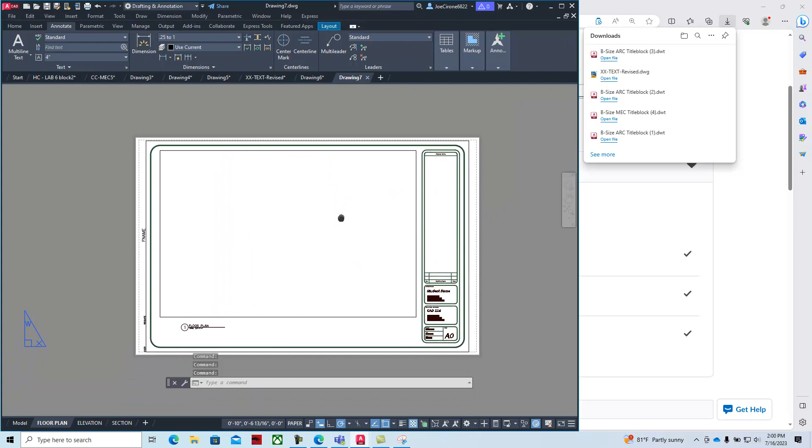So for example, if we download the architectural template and we open that, here's our paper space, and you can see this little right triangle. This is called layout mode. And then here's our model space, and in our model space is where we would do all of our drawing. And so if we were looking at something like our floor plan drawing, in our model space we have this at full size, 17 feet by 19 feet.

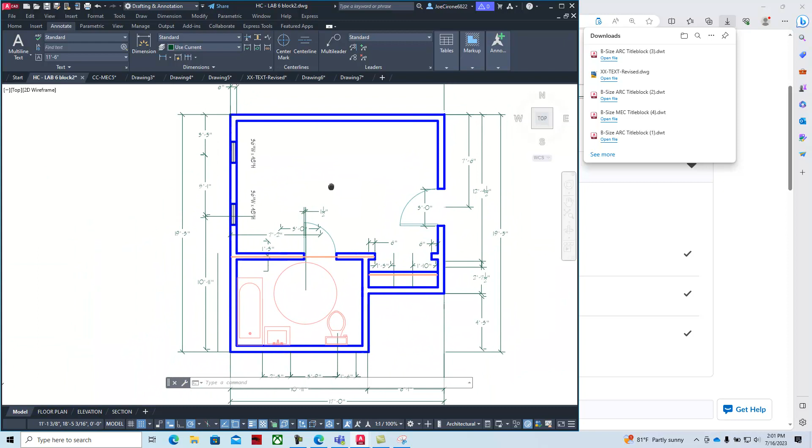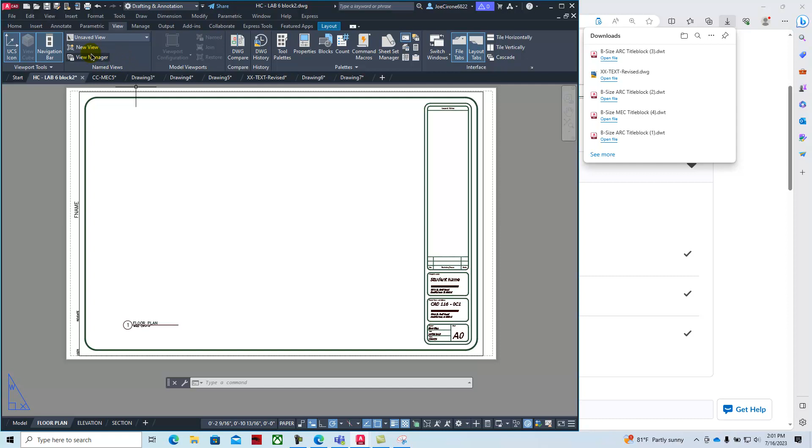And then when we place it on the title block, we go to layout mode, and then we create what's called a viewport. And so if I delete this viewport, and then if I were to recreate the process, the way that we standardize in this CAD course is that we use the viewport layer, and then we go to the view tab, and on the view tab we can create new viewports, and for some reason they get kind of blocked out. Let's see if this is the one. New view. No, that's the view command.

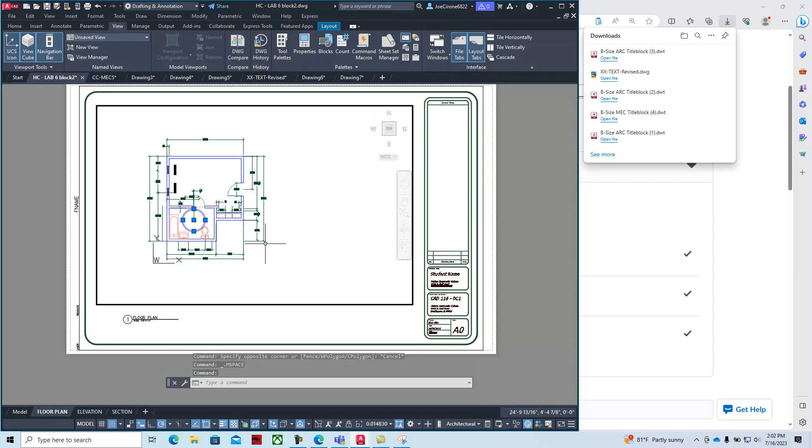So we'll use the menu bar and we'll go to viewport, and we'll create a viewport. And so we can say one viewport, and we create a rectangular viewport, and then if you double click in that viewport, that's where you see what you drew in model space. And so you can edit it right there in the viewport. Some people in interior design will do that. We can talk a little bit about that, where we have special settings within the viewport tabs. But you'll also notice that when I deleted that circular shape in model space, it's also been removed. And then if I were to undo that till it comes back, you'll see it in model space as well.

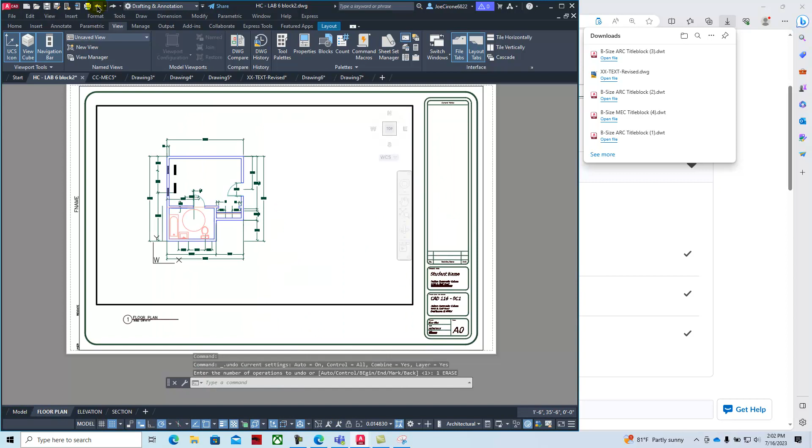And so we use these viewports to set the scale within the viewport. And so here we can go through and set up a scale factor for that. And so by setting a scale factor, when we bring this drawing to the facilities department, we can then use a scale to measure it. And so we could go and get an architectural scale from Amazon, and then we would be able to go through and measure that precisely.

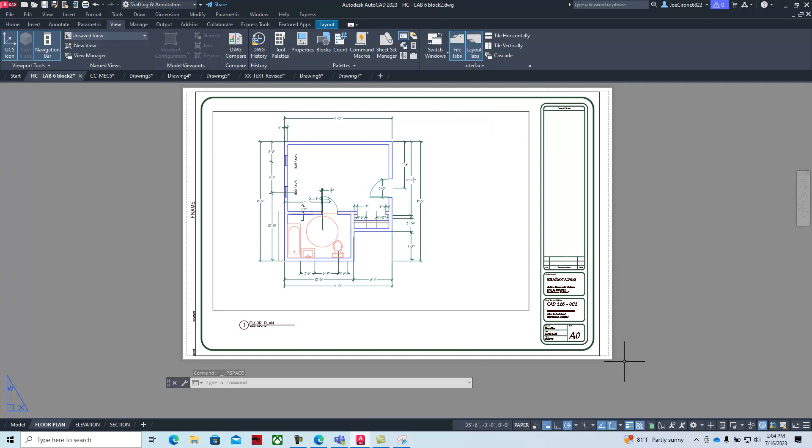So for example, if you were going to measure this drawing, you could buy an architectural scale, and then the units of measurement for 1/4 of an inch equals a foot can be measured using an architectural scale. It's a little tricky, but it's not that difficult when you get down to it, since everything isn't digital these days. That's why we create these drawings in these different viewports with these different scales. So when we print this out on an 11 by 17 sheet of paper, we can then scale the drawing, and the measurements then will translate to the measurements that we have dimensioned there. All right, continuing.

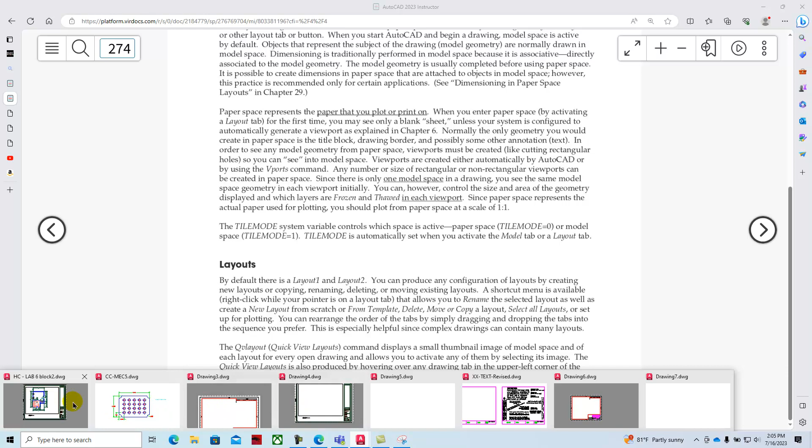So paper space and model space. We draw things in model space, and then we can flip over to paper space. You can type the word TILEMODE, and that would be the command that is used to flip the screen. So if we're in a drawing here and I type in TILEMODE and I change it to 1, TILEMODE 0. Remember, AutoCAD's binary. It's made by computer programmers, and so 1 and 0, on and off, you find a lot of the settings, instead of saying on or off, it's either 1 or 0.

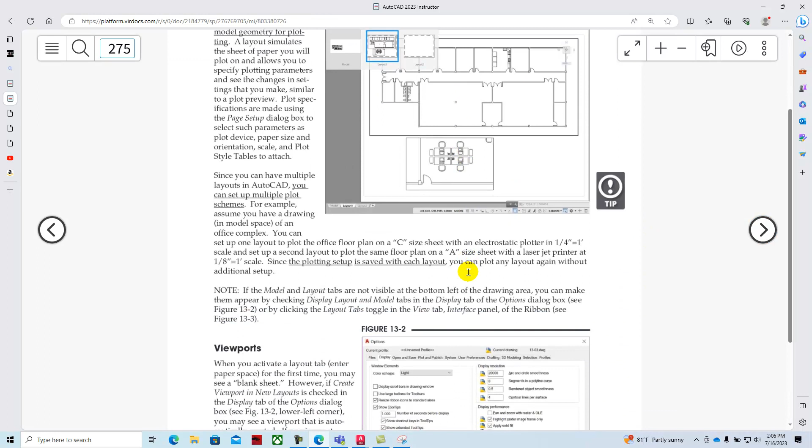So those are layouts. As we work with the layouts, when we have a new drawing that we just start from scratch, you'll get 2 layout tabs. If you're using the architectural template from AutoCAD, then you'll have a floor plan, an elevation, and a section tab. And then we use those appropriately to put elevation drawings and section drawings within that title block. So here's some functions of how layouts work and working with viewports.

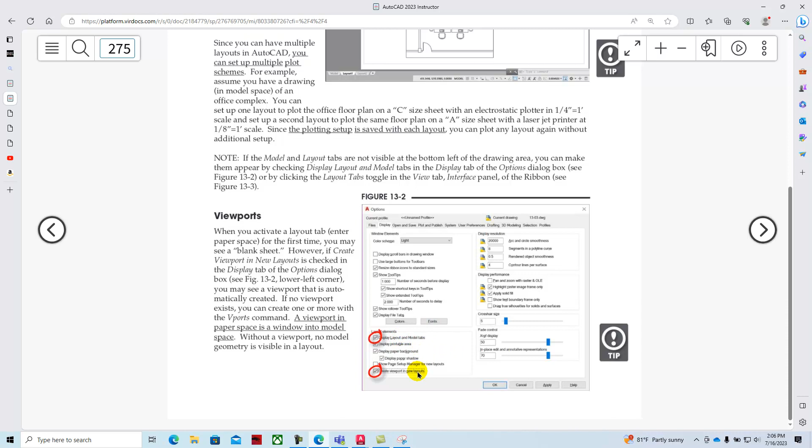And so they go through some of the settings in the options to be able to lock the displays of the viewports and things like that. And then they show that you can actually freeze different layers in the viewports, which is kind of a neat thing. So for example, if I'm in an architectural drawing and I wanted to freeze out this layer, this layer here is on the Furniture2 layer.

Well, you can do that a couple of different ways. One, I can just turn off the layer in model space, and there you can see that it's gone, and that'll be gone in layout as well. And then I can turn that back on, and on and off and freeze and thaw are the same. It's just one recalculates out the databases.

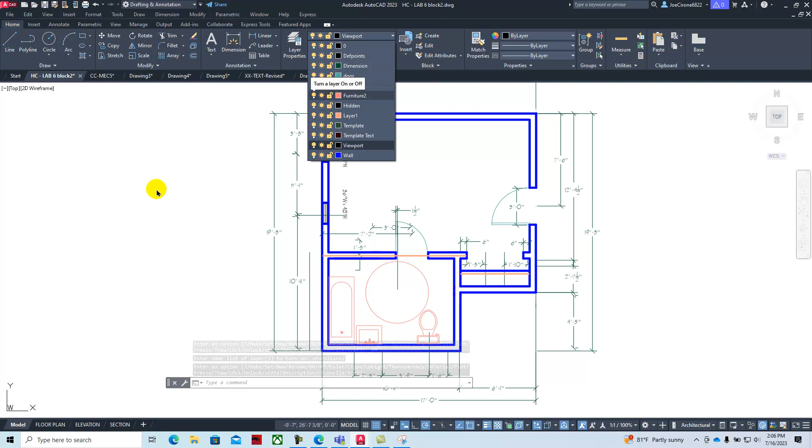And then if we go into the layout mode, on architectural drawings, like for interior design, they'll use this technique where in the viewport they'll freeze out that layer. And so here's viewport layer freeze, and then you'll see that that information is gone. And I could do the same thing for the dimensions. I can take the dimensions off.

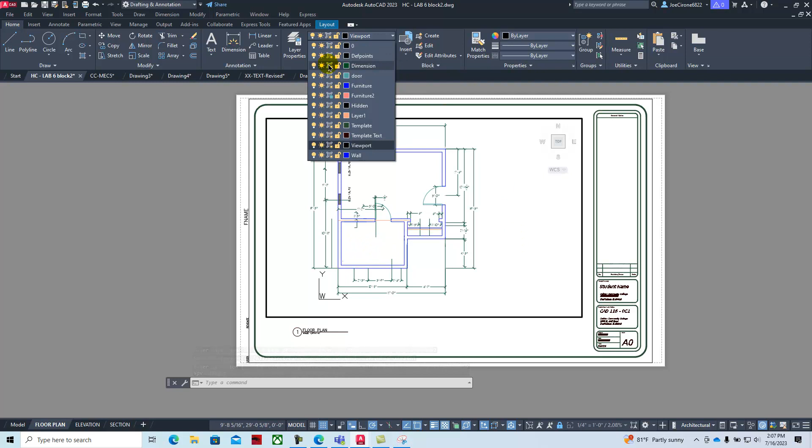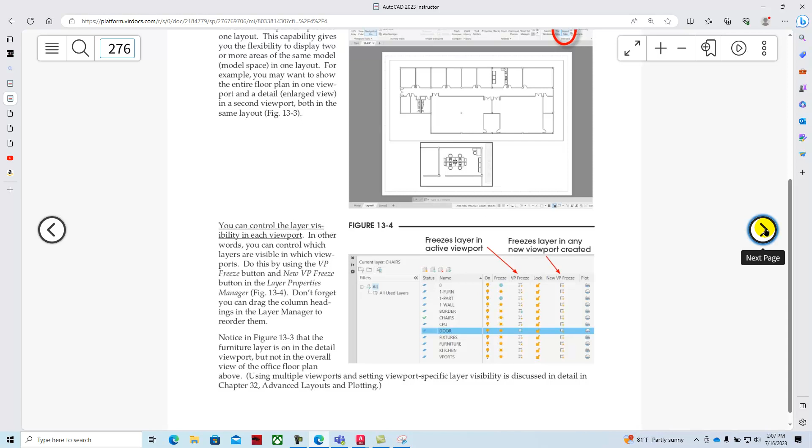And so oftentimes on drawings that are just showing the furniture or something like that, they'll freeze it within the viewport, but that leaves the model intact. And so that's some of the techniques that we can look at as we learn about viewports in this chapter. And so we have these different layouts that we work with, and then we can create different viewports. You can see here's one large rectangular viewport, and then there's another smaller viewport.

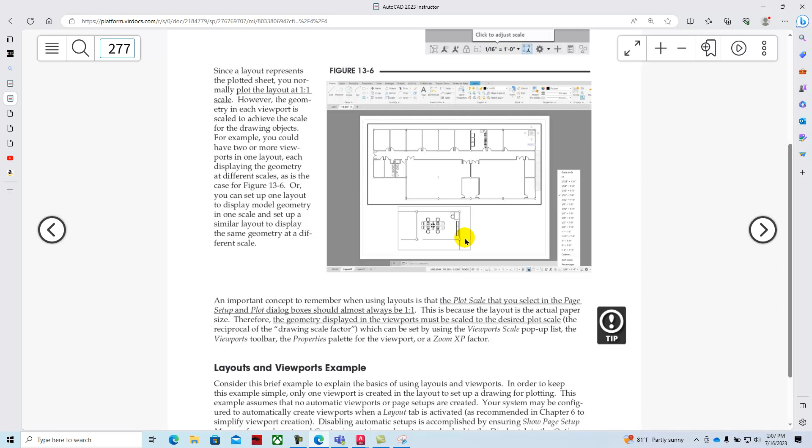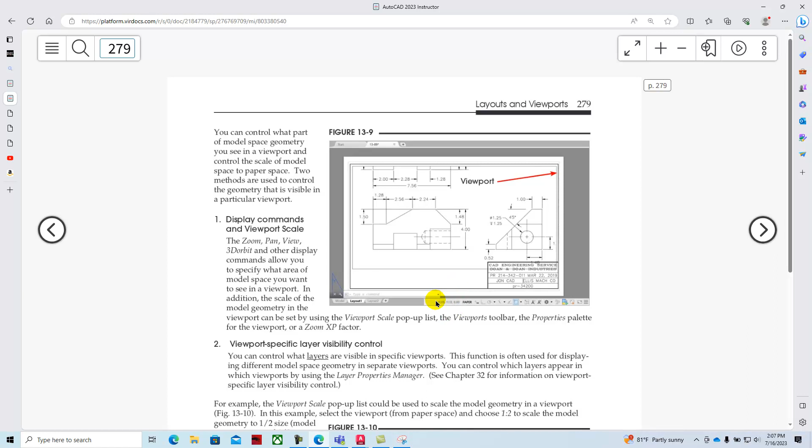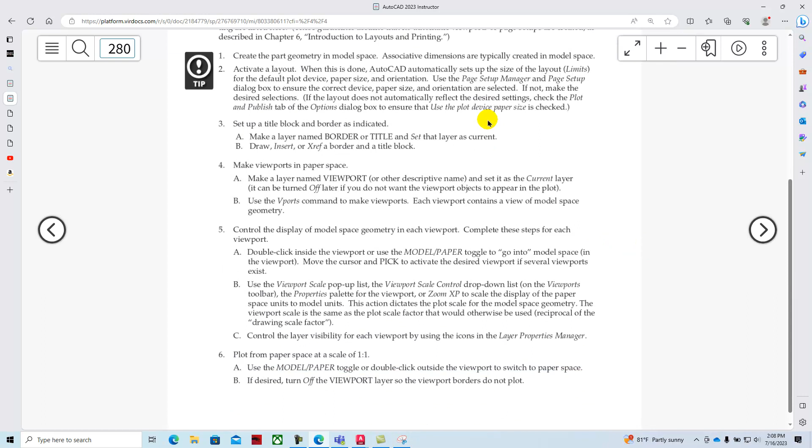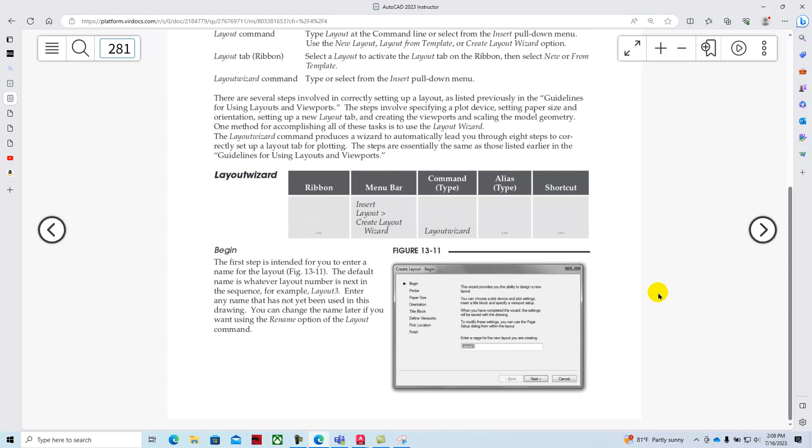And then here with this mechanical drawing, they go through some of the automation, kind of like in SolidWorks, where you can create a drawing at scale with viewports using a layout wizard. And so here's some of the guidelines for using viewports and layouts, and then creating and setting up layouts. You can use the layout wizard, which will create the viewports for you on the drawing in the title block, but essentially we can create those the old-fashioned way, which is basically in the drawing.

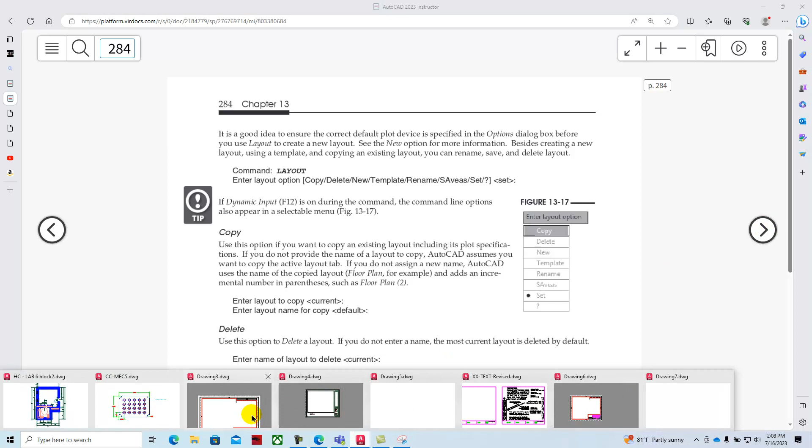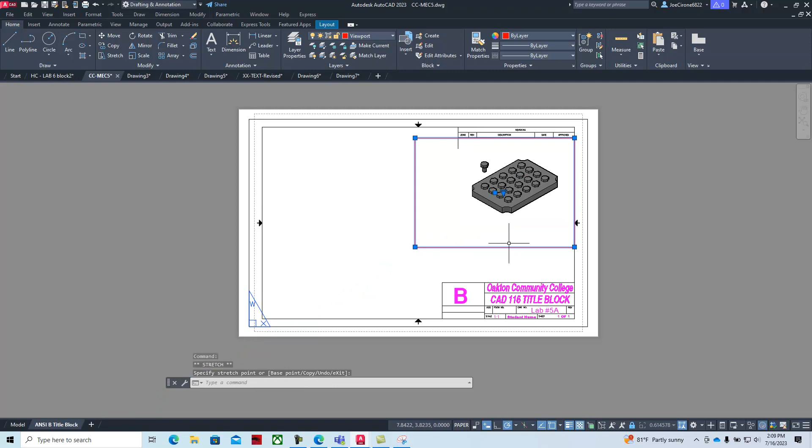Here we have, for example, our mechanical drawing, and we have 2 viewports here. We have a viewport of the top view, and then we have an isometric viewport. And so if I were to recreate this, I could double click out here, click on the one viewport and delete it, and then you'll see that that goes away, and then click on the other viewport and delete that one as well. When you're in Paperspace, it treats viewports just like an object, just like a rectangle or something like that. And then when I delete them, they're gone.

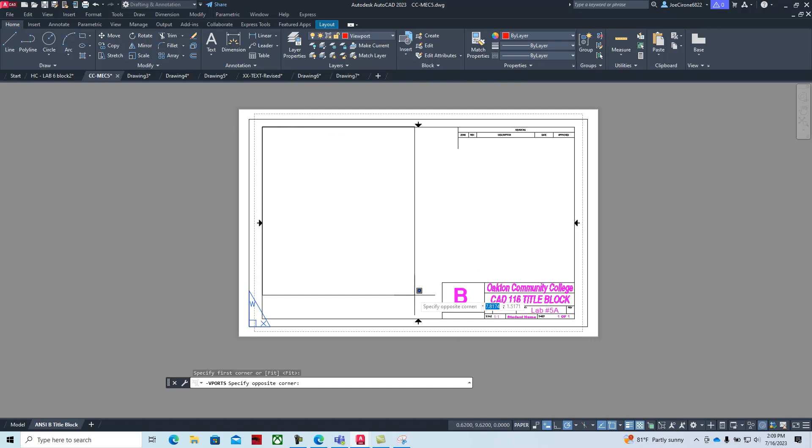And what we do is we create the viewports on the viewport layer. And then if I wanted to create a rectangular viewport, I could say view, viewport, one viewport. If I said 4 viewports, it'll make 4. And you can try that out. You can say, give me 4 viewports, and it'll create the 4 viewports. And then you can toggle what you want to see in those different viewports.

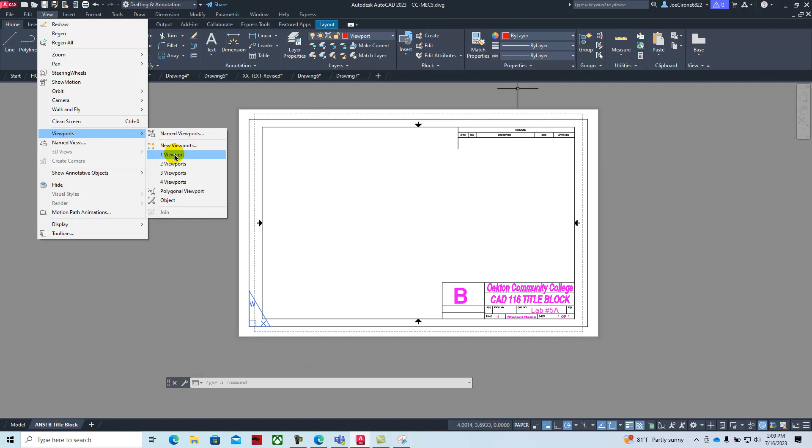This one's just set up at 2D. Double click out of that and delete that. And then if we wanted to put a viewport in, we could say view, viewport, one viewport, and then we can just go from corner to corner here, double click in that viewport, and then here's our drawing.

And so what we do is we put our drawing in here, and I typically will set that up at full or half scale. Try it at full scale, see if it fits. It does. We'll turn off our grid. And then what we'll do is we'll lock that. So we put the drawing in, and then we lock the viewport so that the scale doesn't change.

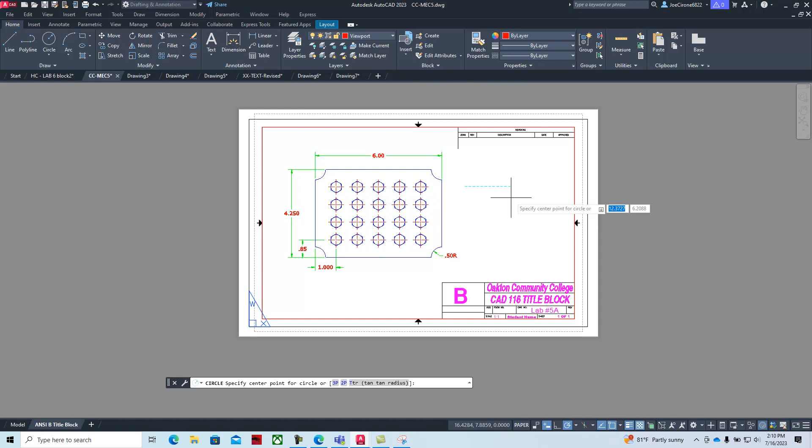And then if we wanted to, we can create another viewport. And so for this example, I'll just draw a circle, and then I'll convert that to a viewport by saying view, viewport, object. And what it'll allow me to do is turn a closed boundary shape into a viewport. And then I can go through and I can set up the view scale for the other drawing.

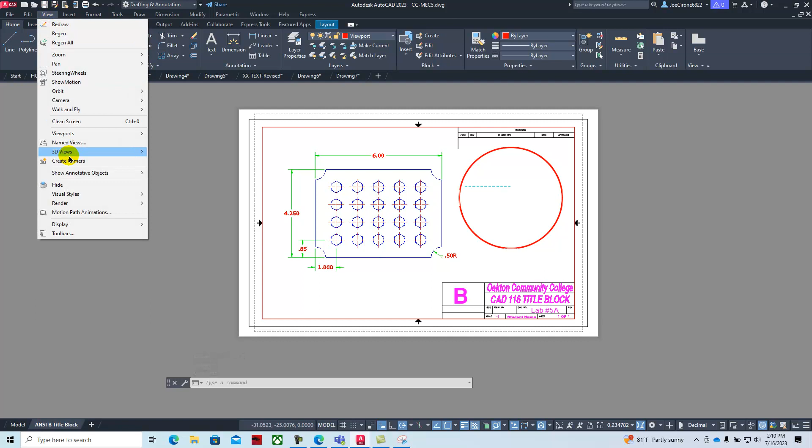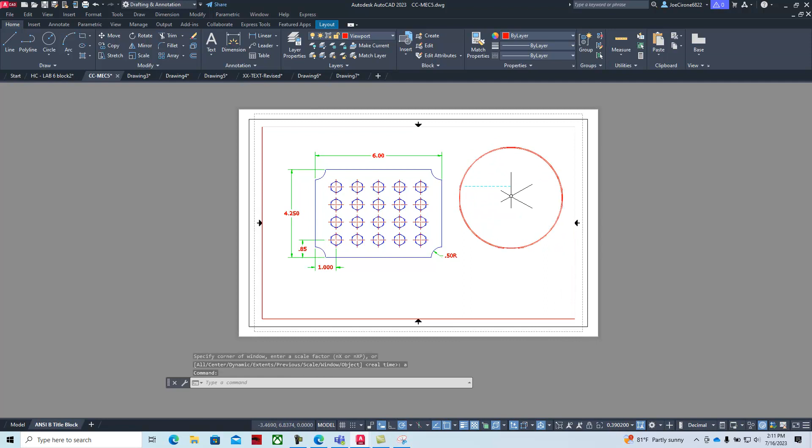And so I can go here and say, make that an isometric view, and then see if I can get that shown. Let's see. Sometimes it can be a little tricky. And then we can go within that viewport and be able to change some of the different styles and things.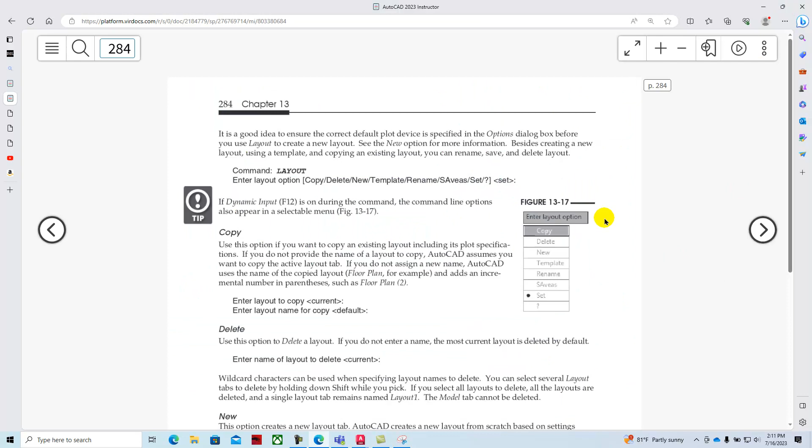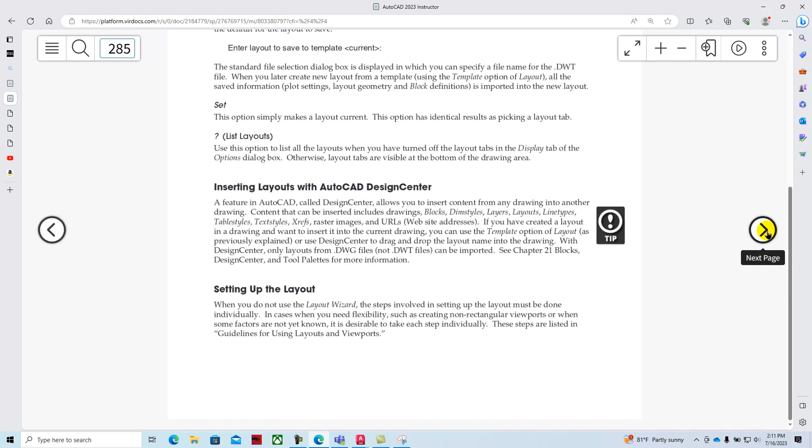And so as we go through and we work on these viewports, there's a number of different factors that play into components. And so as we work with our viewports in these different layouts, that's the basics on how to work with viewports and layouts. And then as we go through, there's some other options for creating those viewports automatically.

And then there's some other aspects to CAD which are a little bit more advanced when we go into page setup. And so we can go through on the layout, and this is essentially when we're getting ready to set that layout out for printing, because essentially we create these digital books of the blueprints. And what this is talking about here is to automate the plotting routine.

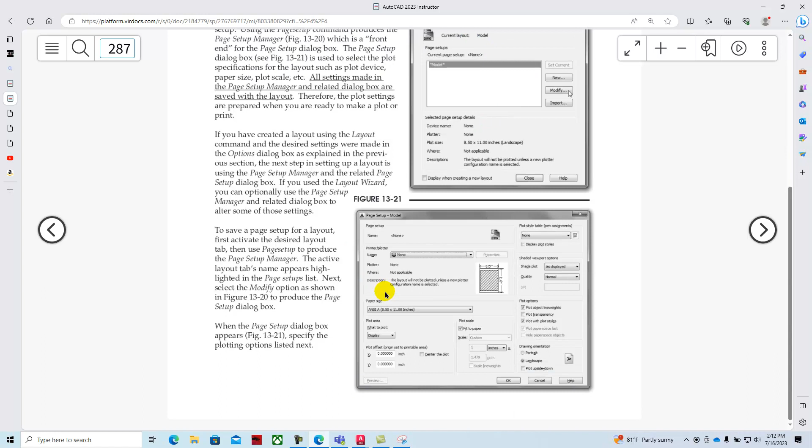And so what you can do is you can have the paper set up and associated with a specific plotter. Let's say you have a plotter at work that prints 11 by 17. Well, you set the layout manager or the page setup manager to the printer so that it will have the proper output settings for that printer. And then once you have that, you can automate the entire production of those blueprints.

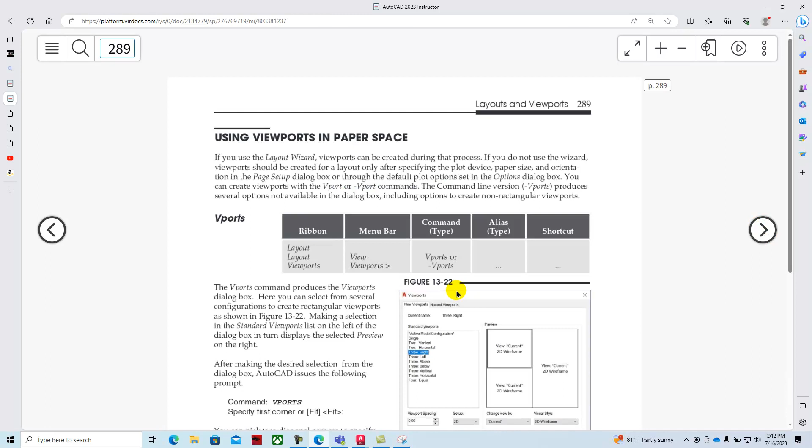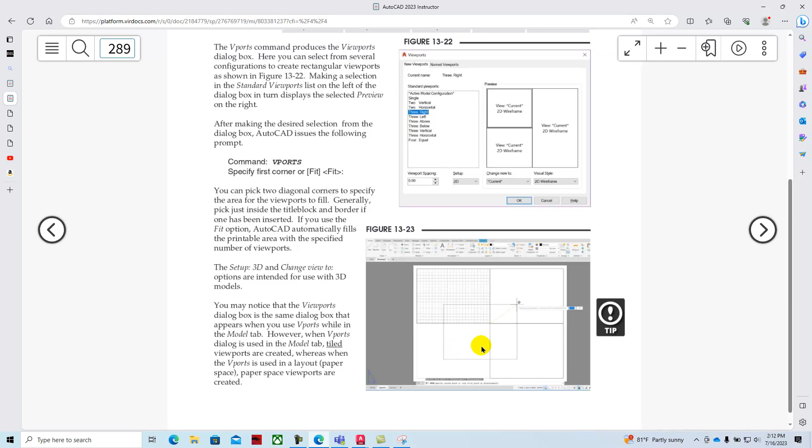And so it talks a little bit more here about viewports. When we work with viewports, we can either have viewports like I just demonstrated in paper space, where we have these different viewports that we can toggle in between, or when you're in model space, you have the ability to have model space viewports. The model space viewports allow you to kind of toggle between them. But essentially they use viewports in paper space to show different details.

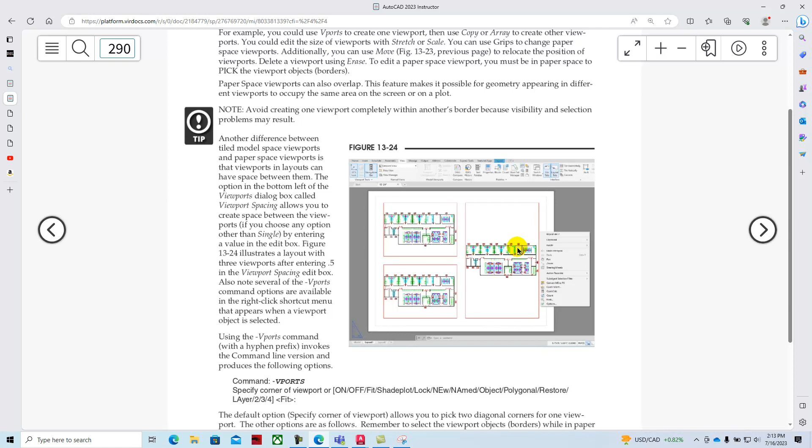And so here's like an architectural blueprint, and what they can do is have like a large overall print of the facility, and then maybe zoom in on some feature like the plumbing in the bathroom or something like that, and it would be like a detailed view of the object. And so the viewports are used so you don't have to redraw everything.

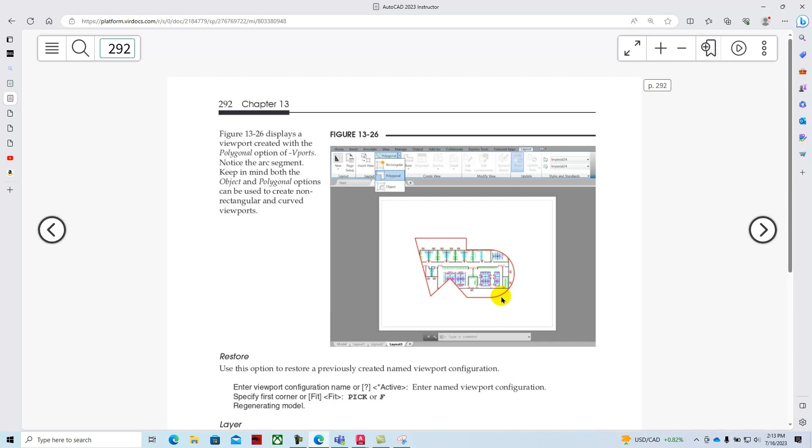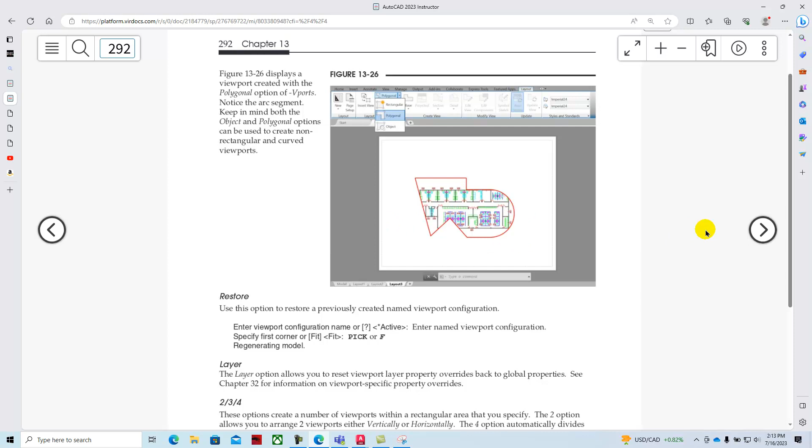In the past you would copy and paste all the drawings, and somebody says, well, what if we just had one that we linked to? And that's how the parametric aspect starts to play into CAD. As you get more skilled with your CAD skills, what you'll find is that they have what's called parametric relations, which then link one view to another so that when you update something on a drawing, everything updates.

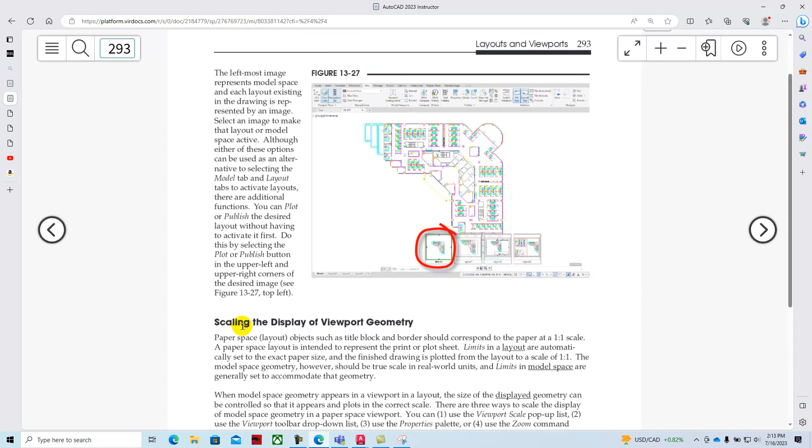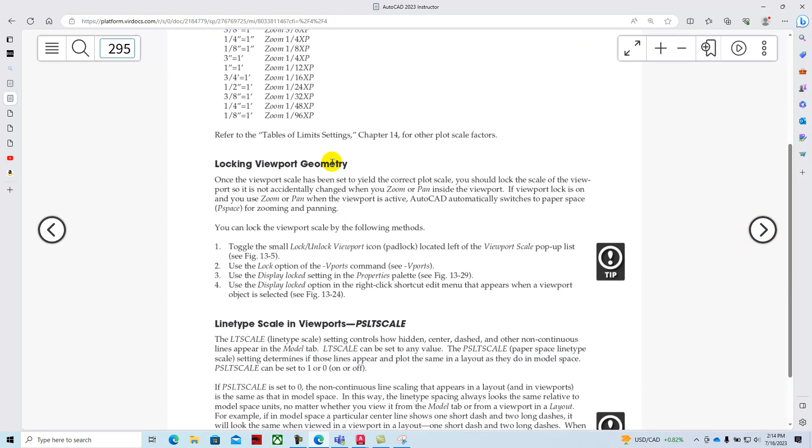And so here's some other examples of the file that we had in the last module, where you can just look at the viewports and how you can scale the geometry, and how you can set up the viewport scaling, as we talked about, to be able to measure it with different rulers. Be sure to lock the viewport after you've created it, otherwise you just have to keep resetting it and relocking it.

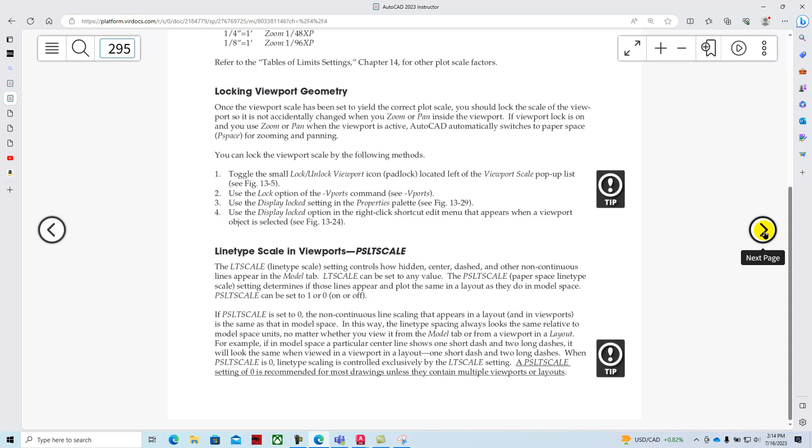And then they talk a little bit about line types and line weights. Oftentimes we'll have to invoke the PSLTSCALE and enable that to get line types to look right in paper space. Alrighty, so that's the chapter 13 information, and that ends this lecture.